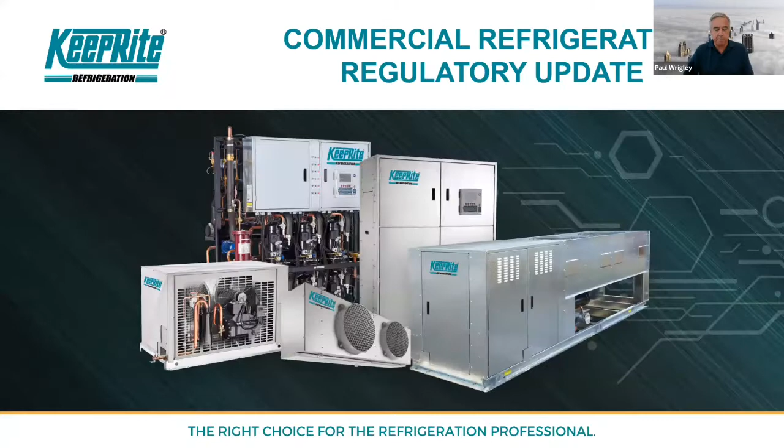Hey Paul, thank you for the introduction. I'm going to be talking today about commercial refrigeration regulatory updates. We've had a lot of change in the industry this year, from things such as refrigerants to energy efficiency regulations. So I'm going to go over those with you today. I'm sure there'll be lots of questions, so please feel free to ask. Again, I want to thank everybody for being on this webinar and for your time here today. Next slide, please.

So the refrigeration industry has kind of been under the microscope for some time now. Government bodies from around the world have been taking a look at it, trying to see what kind of changes can be made in terms of more environmentally friendly refrigerants and better energy efficiency. So things started rolling in Europe, and we've seen it come over to North America. So everybody's kind of been focused in on the industry. Next page, please.

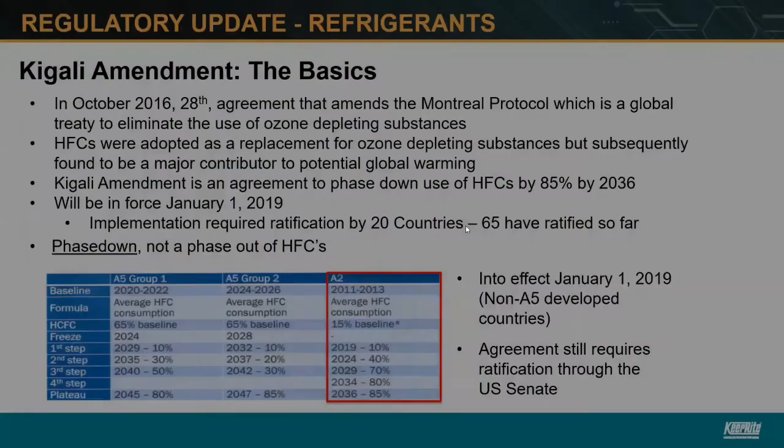So what's driving it in North America and a lot of countries around the world is something called the Kigali Amendment. I'm just going to go over the basics of what that amendment is. Basically, it's an agreement that makes an amendment to the Montreal Protocol, which was a global treaty to eliminate the use of ozone-depleting substances. We were using HFCs as a replacement for ozone-depleting substances because we were putting a hole in the ozone layer. But then we found that those HFC refrigerants were a major contributor to global warming. So basically with the Kigali agreement, there's a phase down in the use of HFCs by 85% by 2036. And this already went into force on January 1st, 2019.

So Canada kind of falls in that red box there, the A2 countries. You can see what the steps are in terms of phase down. As of now there's about 65 countries that have ratified so far. And it's important to note this is a phase down, it's not a phase out of HFCs. Next slide, please.

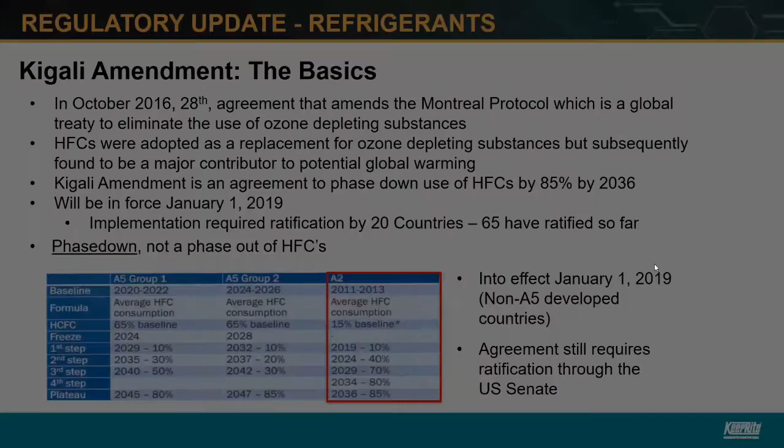So we're doing a two-pronged approach here in Canada. We've got the quota system in effect. And then what Canada's also doing is they've put a product-specific control on different types of products in different industries. So they've put a global warming potential limit. You're going to start hearing me refer to global warming potential as GWP for short in the next slides. But you can see from this table that there's a few industries affected.

At KeepRite Refrigeration, the equipment we build that's affected falls under centralized refrigeration systems and condensing units, which is 2,200 GWP as of January 1st of this year. You'll see some other industries as well, such as standalone medium temperature refrigeration and standalone low temperature, both commercial and domestic. They've got different GWP limits coming in 2025 for domestic, so things like your household refrigerators. You'll also see chillers and mobile refrigeration on this list as well.

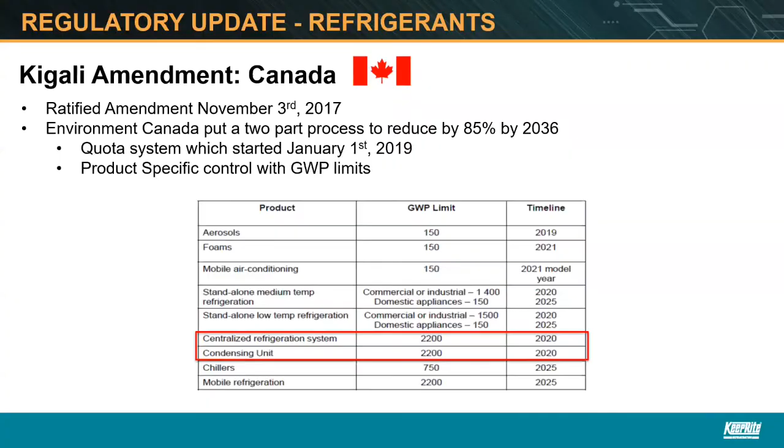So basically what happened at the beginning of this year is that 404A refrigerant and 507, which have been around for a long time and have been the main refrigerants used in refrigeration, you can no longer use them on a new installation. The government put a hard line in at 2,200 GWP. If you're using any new refrigerants, they've got to be under that limit.

So in the middle of the screen, in the red box, those are the refrigerants you're going to see now mainly in the industry: 448A, 449A, 134A is still around, 407C and 407F. I also put R410A in here, which is an air conditioning refrigerant, just to give you a mark as to where the GWP is compared to the refrigeration refrigerants. And then you've also got your 407A.

Now there are a lot of other refrigerants on the market with GWPs much lower than that 1400. There are some challenges with those refrigerants though. You get into issues such as high pressure with CO2 systems. Ammonia is a great refrigerant, but it's also toxic, so it's limited in its applications and where it can be installed. You'll also hear a lot of talk these days about propane as a refrigerant. Propane's got a limit charge of 150 grams right now, so it's limited in what you can use it for. But it is getting more popular, and there are other refrigerants out there that are blends, HFOs and blends with some challenges around low temperature capacity, but we'll talk about that a little later.

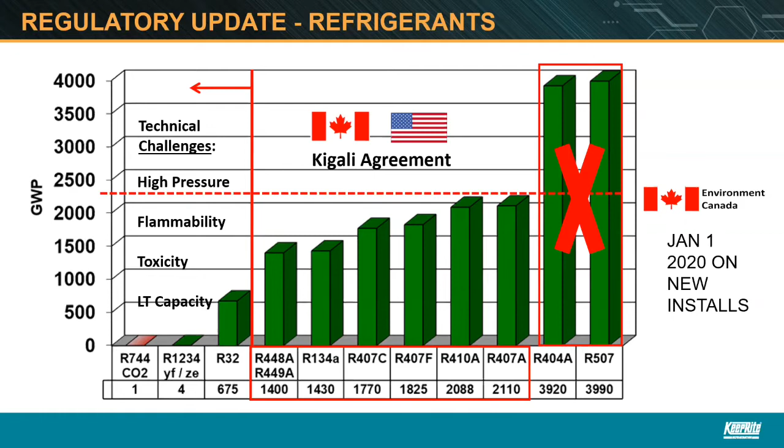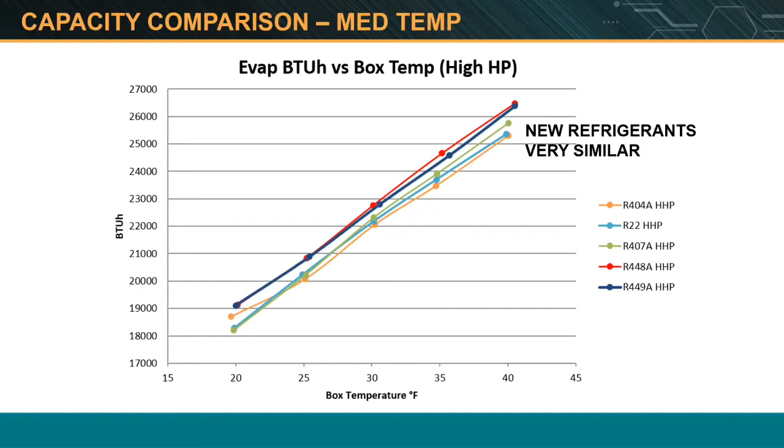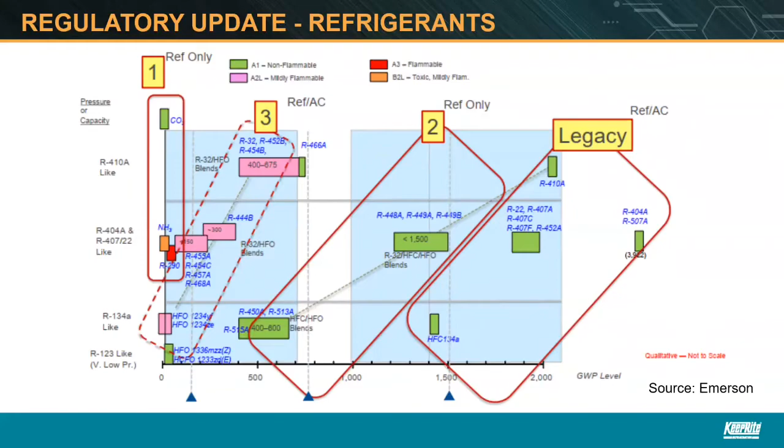So I guess at this point, while we're talking about refrigerants, before I move on to some of the other regulations, is there any questions so far on the refrigerants? Just give a couple minutes if people want to type any questions in now.

Just finishing off on the refrigerants, where we see the industry heading is low GWPs, probably below 150. California's already got something in place where they're going for refrigerants below 150. Quebec's also got a proposal that looks like it's going to take effect January 1st of next year, looking at refrigerants below 150 as well. So there are refrigerants out there I'm showing here - these are all mildly flammable, but they all act like a 404A refrigerant. They're just different blends from different companies, but they do exist, and you probably will see them in the near future.

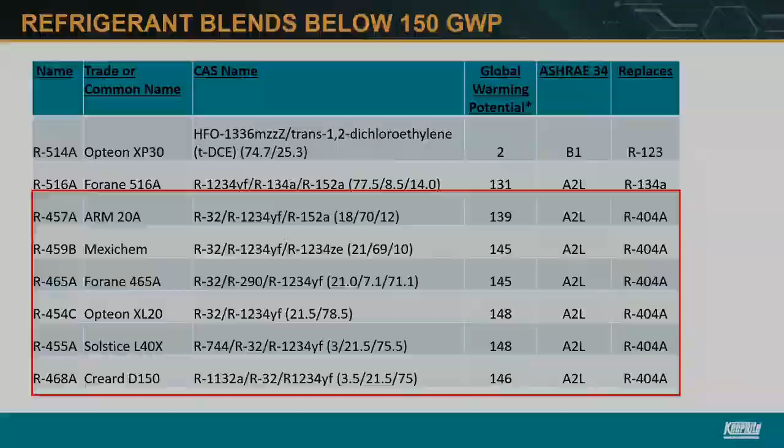So what do we really need to know about refrigerants today? The industry is moving away from these high global warming potential refrigerants. We want to try and get as close to zero as we can. R404A and 507, which has been around for a long time and is a very popular refrigerant, can't be used for new installs anymore, but having said that, you can still use it for replacement. So if you were replacing just a condensing unit in a system or just an evaporator, you can still use 404A components there.

So 404A is going to still be available for component replacement or service of existing equipment well into the future. It's kind of like what you've seen with R22 - it's phased down, but it's not phased out. You can still get the refrigerant. Main refrigerants you're going to see going forward from the manufacturers are R448A, 449A, 407A, and 407C. There are some other ones as well I didn't mention, but those are kind of the main ones you're going to see. Now, one thing to keep in mind with these new refrigerants - they're blends, and they do have a high glide on them, so it's a little bit trickier to troubleshoot. You might see some different frosting patterns on the coils, so just some different things you got to look out for there.

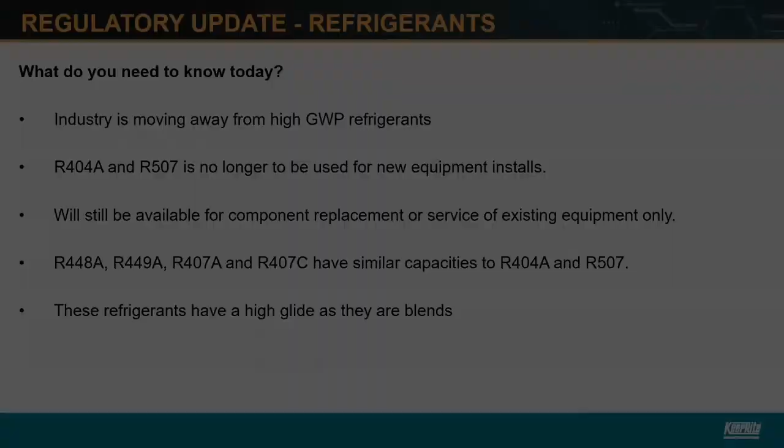Okay, we're going to change gears here a little bit and talk about something called annual walk-in energy factor, or AWEF for short. I'm going to refer to it as AWEF in the next slides. What the annual walk-in energy factor is, it's something that the Department of Energy in the U.S. came up with, and NRCan here in Canada has followed suit. So same regulation in effect both north and south of the border, and it's for commercial coolers and freezers that are under 3,000 square feet. These new regulations establish a minimum efficiency level for refrigeration equipment.

So kind of neat because we've never had that in the refrigeration industry before. If you look at the air conditioning industry, we talked about EER, and so now we finally have an energy efficiency regulation in refrigeration. It applies to all the different types of refrigeration equipment, and it's really put a lot of change into the industry. A lot of the manufacturers have had to make some pretty big changes to their equipment to be able to get to the efficiency levels they require. So we'll talk a little bit more about what those levels are here.

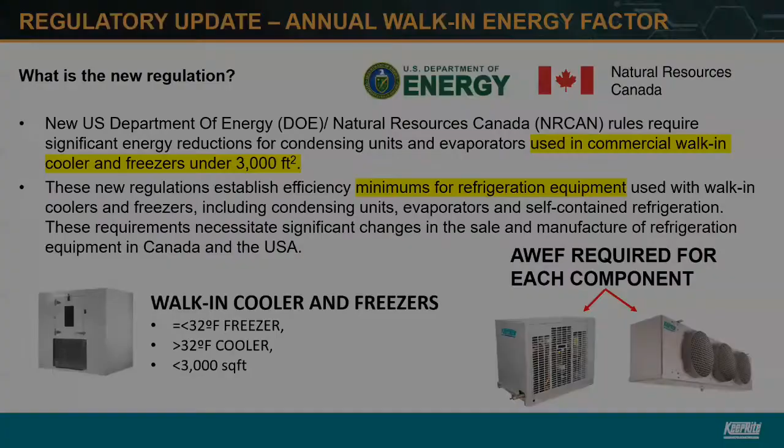So to better understand AWEF, there's some important definitions. Basically, it only applies to walk-in coolers or freezers less than 3,000 square feet. To give you guys an idea, a box that's 50 feet by 60 feet, that's 3,000 square feet. So you know that in the industry, you'll see a lot of boxes that are a lot smaller than that, so it really does impact those general storage coolers and freezers that you see in the industry. Box temperature is defined as being greater than 32 degrees Fahrenheit. A freezer is anything that's equal to or less than 32.

Now, a dedicated condensing refrigeration system is one of the following types: either a dedicated condensing unit, a single package dedicated system - so that's just a packaged unit - or you might have a matched refrigeration system where you've got the condensing unit and evaporator. Now, that dedicated condensing unit is further defined as having one or more compressors, a condenser coil, and one refrigeration circuit, and it's only designed to serve one refrigeration load. So if you've got a unit serving multiple boxes, it would not have to comply with the regulation.

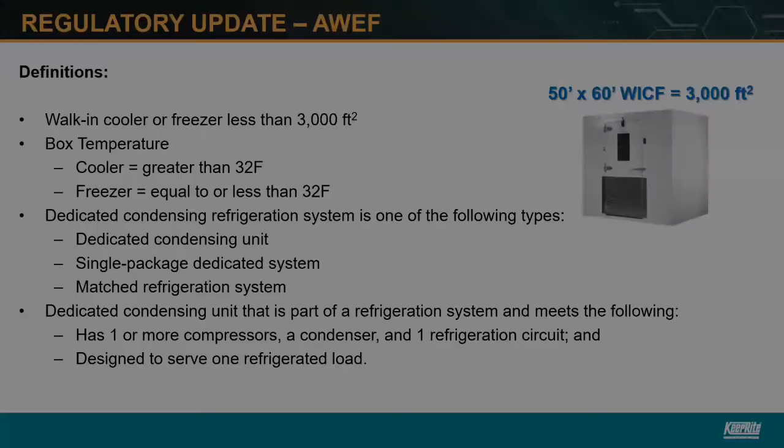So in a nutshell, the way I want you to think of AWEF is as your seasonal energy efficiency ratio that you would have in air conditioning. They are calculated almost identically - they're expressed as BTUs over watt hours, and basically it's a ratio of how much heat you're taking out of the space to how much work you're putting in. Now, the one thing that's a little bit different with AWEF is that you have to have an efficiency for each one of your components, so the evaporator and the condensing unit.

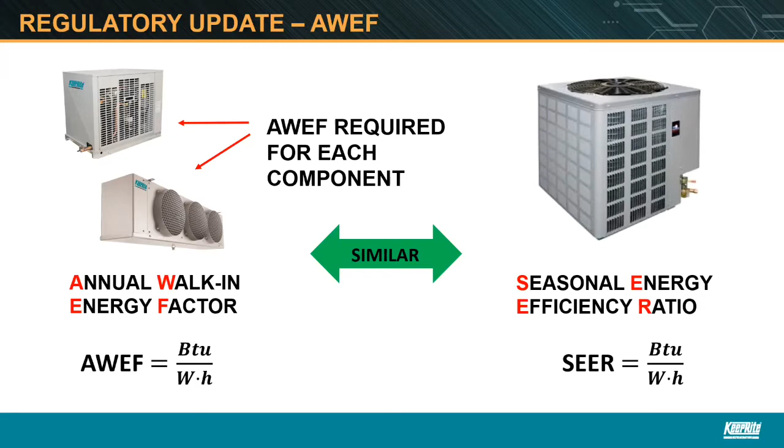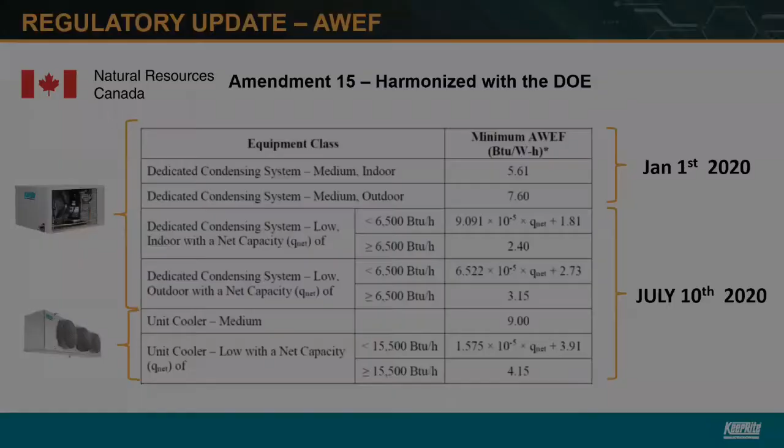So what we did at KeepRite, we came out with our Generation D condensing units last year. We've added more surface, so larger coils on some models. We're using ECM fan motors on some sizes, and we've eliminated some sizes due to compressor efficiency. Other manufacturers, you're going to see similar things—microchannel condenser coils, a whole redesign on their condensing unit, or floating head pressure controls. That's a few of the ways the industry is adjusting to this.

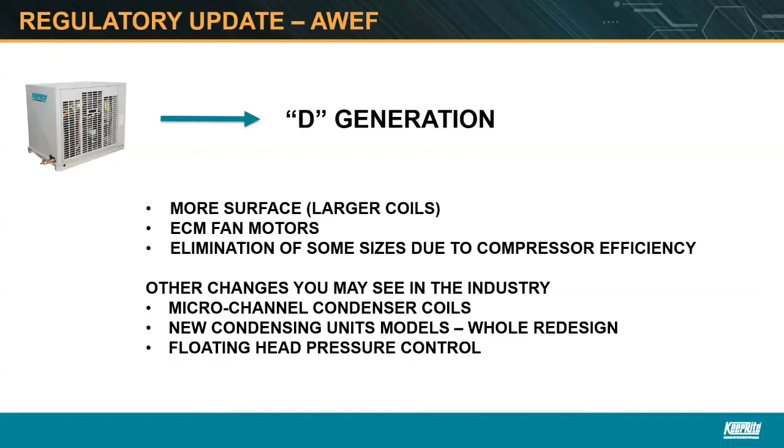Same thing on our evaporators—they just went into effect on July 10th. We're using ECM fan motors as standard now on those, and one thing you'll see is lower fan speeds on most models. If you look at the fan laws, there's that third fan law with the cubic relationship between fan speed and horsepower, so a slight reduction in speed gives a good reduction in horsepower. It's a way to save a lot of energy.

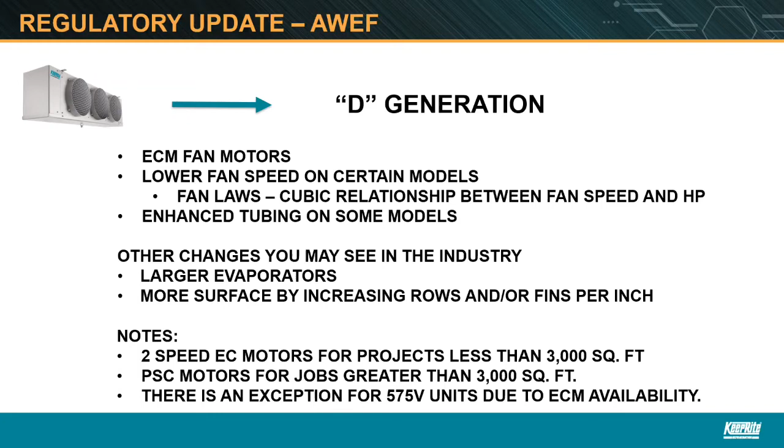We've done enhanced tubing on some models. Other changes you might see in the industry include larger evaporators—increasing surface by adding more rows or more fins per inch. One thing to note on our equipment: we'll use a 2-speed ECM fan motor for projects less than 3,000 square feet to meet the regulation, but for a larger job, you can use a regular PSC motor. Also, here in Canada, 575 volts, you can't get an ECM motor in that voltage, so 575 volts is actually exempt from the regulation.

Now, the one thing that's a little different with this regulation is it doesn't affect all of the equipment in the refrigeration line. Condensing units serving multiple walk-ins don't have to comply. Water-cooled equipment isn't part of it at this point—it's only air-cooled equipment. And again, walk-ins greater than 3,000 square feet, you don't have to worry about the regulation.

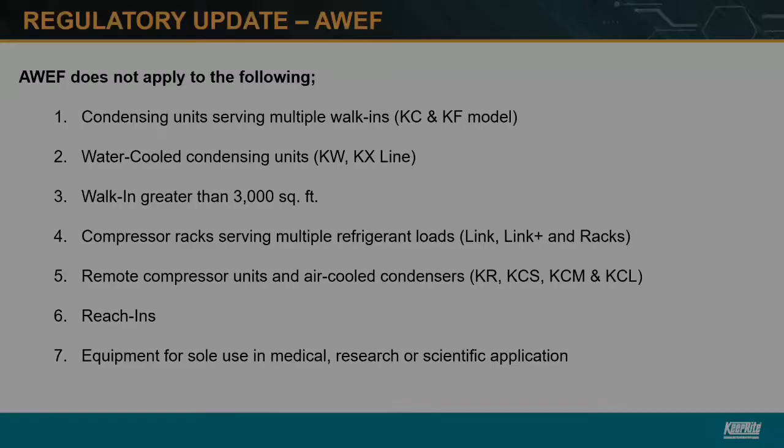Okay, so some important takeaways here from this regulation. Again, it's only for walk-ins that are less than 3,000 square feet. Every component of the walk-in, whether it's a freezer or cooler, must be compliant, and it's based on the date of manufacture of the product. It's not based on when you install it or sell it. So if you've got something in stock or you're buying something in stock from a distributor that's before the dates of July 10th or January 1st, then you are okay to install that equipment.

And not only does the refrigeration equipment have to be compliant, but those boxes, those panels that you buy to make the box, they also have to have an AWEF value on them. So you're going to see some changes from the box manufacturers as well. Now, compliance with this regulation is required whether the equipment's for a retrofit or for a new installation.

One thing that some of you might have been familiar with in the past is taking an indoor condensing unit, if you had one, and converting it to an outdoor model. And you can't do that anymore because of the labeling requirements of the regulation. We have to actually put on the nameplate whether that specific piece of equipment is for indoor or for outdoor use.

Now, in terms of responsibility, as the manufacturer, we have to make sure that the equipment we build, how we do our testing and certifying and labeling, meets the regulation. At the wholesale level, they've got to make sure that the equipment they're selling to the contracting community is compliant. And then ultimately it falls onto the contractor to make sure the equipment going into the installation is compliant. Okay.

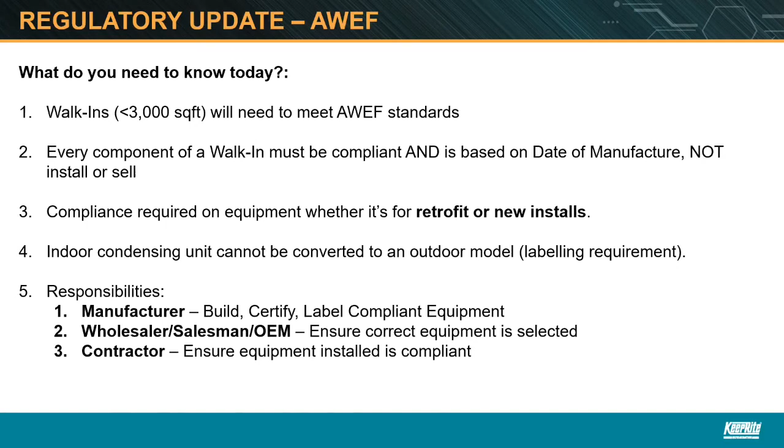So you can kind of see there's a lot going on with this regulation. There's been a lot of confusion in the industry this year. A lot of people asking questions. When do I have to worry about AWEF? When do I not have to? Does this piece of equipment meet the regulations?